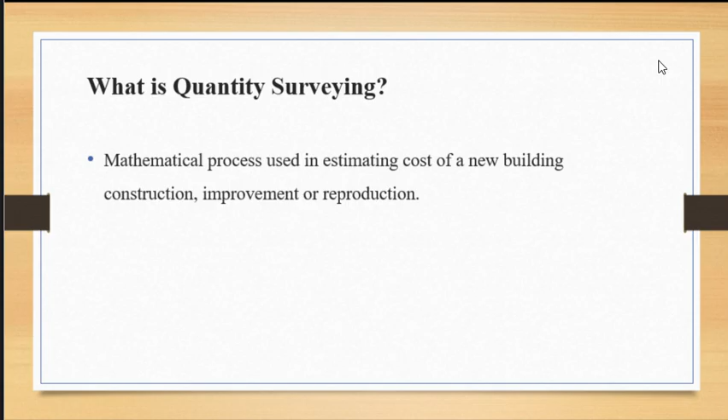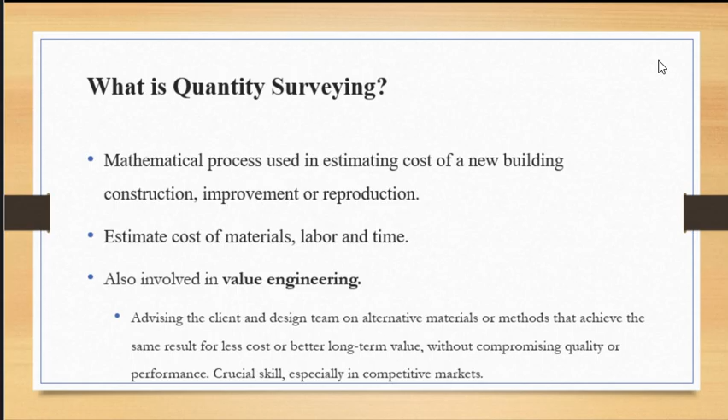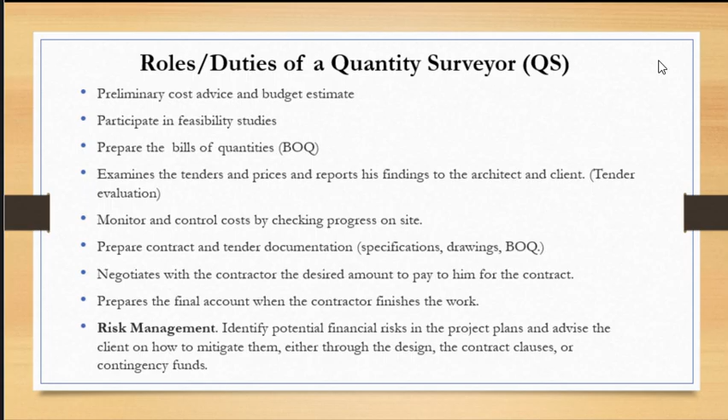Okay, in the last lecture we went through what is quantity surveying, what are we required to do in quantity surveying. We went through some modern concepts as well, for example, value engineering, and what are the duties of a quantity surveyor, and again something which is expected more in modern projects from the quantity surveyor is risk management, that you have to be an advisor to your client. Okay, if the project cost comes out to be 10,000 BD, but you know that can be 8,000 BD, you advise your client. Okay, so you have to keep these things in mind.

Okay, what skills and knowledge you should have to perform your job as a quantity surveyor. So most important things are you should have the knowledge of the prices. You should know the standards for measurement, how to measure something. Okay, because for each item the measurement can be different. You don't measure the concrete in the same way as you measure the wall paint or the plaster. Okay, so you must know how to measure them, what are the standards, what are the prices, what are the materials.

Okay, all these things are required, and the standards which we normally follow all across the world are called NRM, new rules of measurement. I don't know why they are still new, but this is what they call them. Okay, as given by Royal Institution of Chartered Surveyors something.

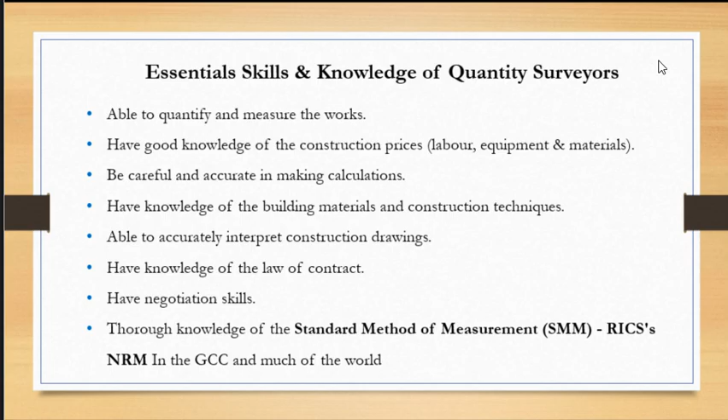And yeah, we didn't go through them, so we stopped till what is quantity surveying, what is the duty of a quantity surveyor, and what he should know to perform the duty which is required from him.

Now we will move towards a very important item, which is the construction contract documents. Okay, as a quantity surveyor you have to read them, you have to understand them, you have to prepare them as well. Okay, so you are involved in all aspects of these documents.

Now the most important thing about these documents, they are legal agreements. Okay, they are legal agreements.

So for example, I give to you something, okay, and I mentioned in that thing that the wall height is going to be 10 feet. Okay, and then in the end I come to the site one day and I tell you, no, I wanted it 11 feet. Okay, so you, before doing the job, this is your responsibility that you will ask me for to make it legal. Okay, you will not just trust me, okay, he is saying 11 feet, make it 11 feet. Okay, because the thing which you signed earlier was a legal agreement. Okay, so when you change your agreement, you have to change it legally, formally.

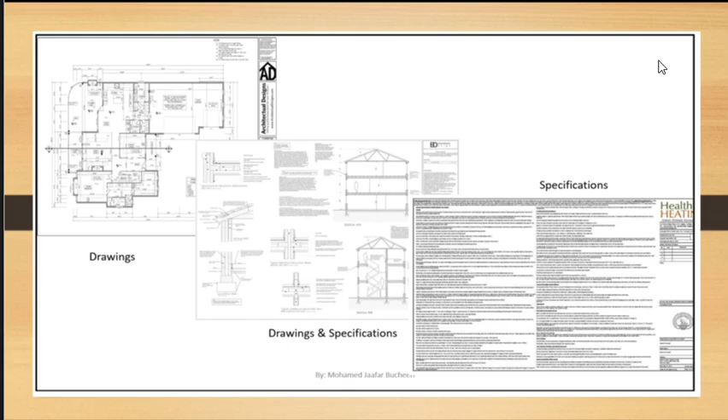Okay, what are the things about these items which should be measured on the site? I will give you an example later on.

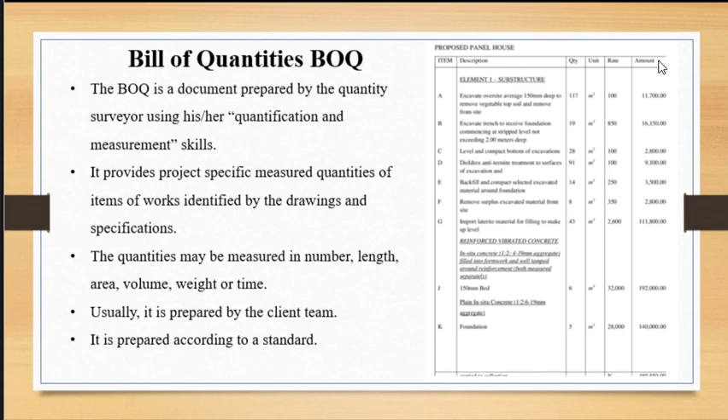Now it is only 4-story, so my foundations are smaller, so I need less concrete here. So instead of 5 cubic meters, I will only do 4 cubic meters. So how much amount will be less from this rate? So any variation, the cost of any variation in the project will also be calculated using the earlier rates of BOQ.

It will also provide you a basis for settling the final account. Final account means the project is finished. But this is what the contractor is saying, the project is finished. You have to go and check, right? So check against what? Against the bill of quantities you gave him earlier. I told you this much concrete, this much steel, this much excavation, and so on. So you must have done all the work according to the quantities which you specified earlier. Only after checking the final quantities will you settle the final account.

Okay, so the final payment is not done. In some cases, the final payment is not done even months after the project. It's like a warranty - you know, when you buy a phone or car or something, there's a warranty period, right? So sometimes in big projects, there's a warranty period as well.

Anyways, the cost analysis which is done in this BOQ can be used in future projects as well. So in most construction companies, when you go there - and I told you this would most probably be your first job - quantity surveying and so on. In most companies, you will see the senior person do the quantity and cost estimation in minutes, which is taking you hours. Why? Because they already have the templates from previous projects.

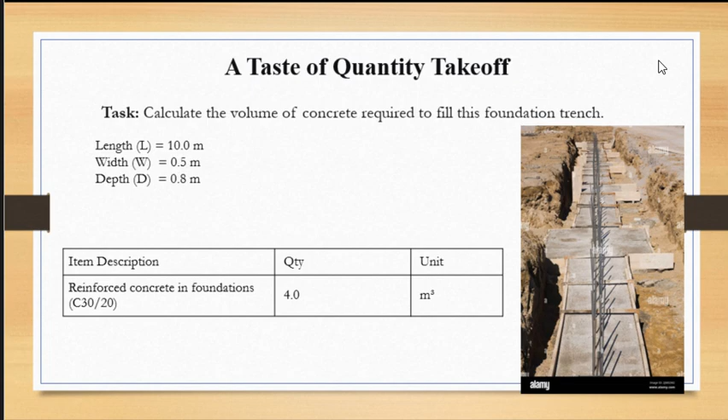Then we have the tender package. We have already talked about it. This is part of construction documents. The tender package is part of construction documents.

So you announce a project, I have a big project. The contractor will come to you and say, I want to give you my quotation, give me the tender document. So you give him the tender document on the basis of which he will do the quotation. Clear?

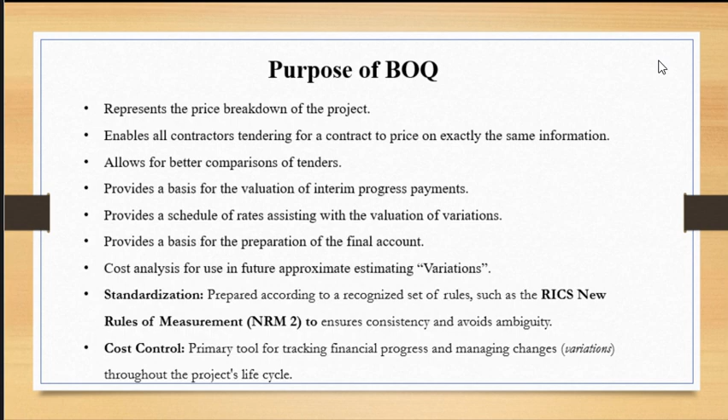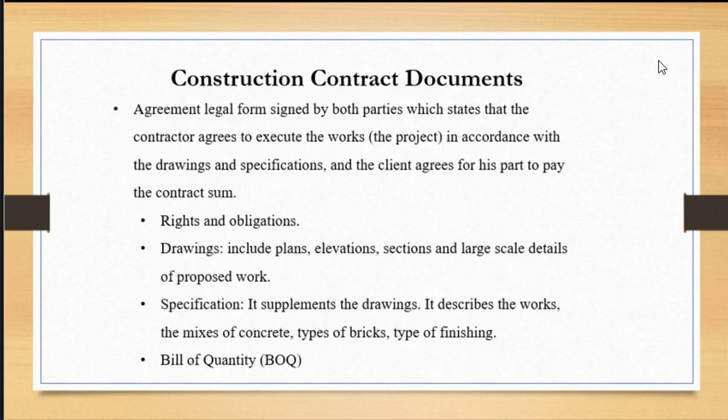This one is when you agree, when he will get the contract. You are my contractor, I am your client. This is the final one.

This one, before or after? Before, right? Before he got the contract. So when he is coming to me saying I need to do your work, I want to take your project, I want to give you my quotation, you will give him the tender package, the tender documents.

What do they include? The agreement, so he must know the terms and conditions. He will not sign it, and there can be some changes. The contractor may say, no, I will not do this, you can change this clause, or maybe you write I will give you 5% advance, but after he gets the contract, the actual final contract may have 10% advance. So these things can change, but the initial conditions are written.

I've already talked about drawing, specifications, and BOQ, and it is used to get the prices from the contractor. The main part, because he's talking about prices, the price will come from BOQ. The main item from which he will calculate the price is the bill of quantities.

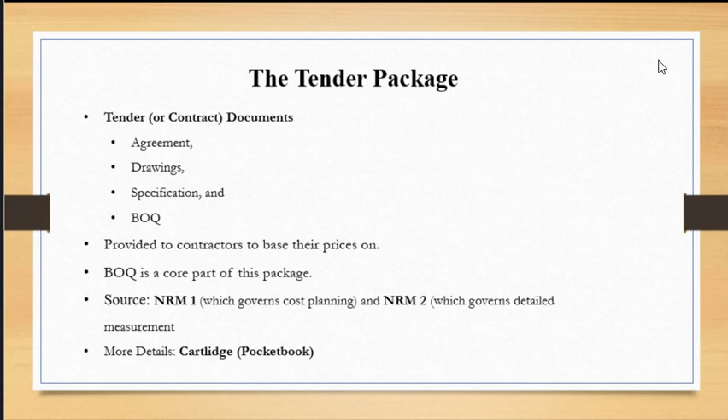And this is taken from the new rules of measurement, 1 and 2. If you want to see more details about it, there's this book on the blackboard.

There are some items which are measured in single dimensions, for example length or depth. So you only tell him, I need this much length of this item, or I need this much depth of this item. We talked about wires, right? For wires, we tell, I need this much length of the wire.

So can he give you any wire of this length? No, you will still give him the other specifications as well. One of the specifications is the cross-sectional area. When we measure something in terms of length, it means the area is what? If I am just giving the length, what am I doing with the cross-sectional area? I am ignoring it. Why?

Is it because it is too small? No. Not necessary. Why would I ignore something? Why would I just tell you, give me this much, 10 meters of wire? It's so constant - what happens? The area is constant. So when you give quantity of one dimension, that means the other dimensions are constant. So I don't need to measure it again and again. My point is it doesn't mean other dimensions are too small or I can ignore them.

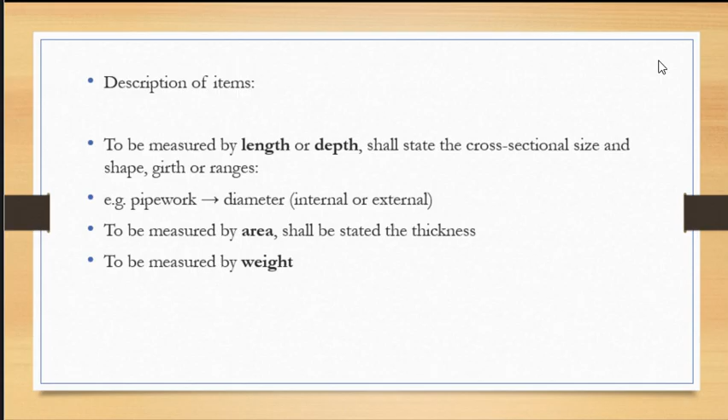So there can be some items in which you may give the thickness as well with the dia. Once you have found the length and the area, you can convert into weight as well, and this is again something which is very common with steel, with wires. Pipes, not so much, but okay - so you give the initial measurement as this much area and this much length, and then later on it can be converted to weight as well.

Okay, then there is soil as well. So soil, you are excavating or something, maybe you are filling up the soil. You already excavated, did the concreting and foundation and everything, now you have to fill up the remaining area. So you may need soil for that as well.

The usual standard is all types of soils can be used for backfilling. There are very special cases where you throw the soil you excavated from the ground - the soil is not good, the water table is too high, the soil is very soft, something like this. Normally we want to use the natural soil for backfilling because it's good for the ecosystem, and it's very cheap as well. So normally backfilling is done with the same soil.

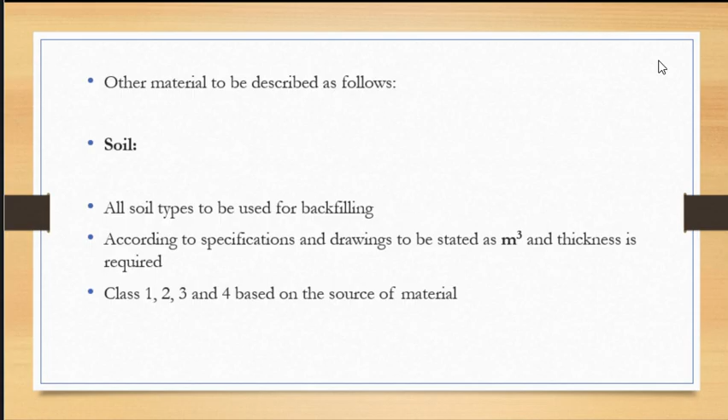And soil is measured in terms of cubic meters. Now, I have already uploaded the books, and one of the books is the new rules of measurement, NRM2. If you go to that standard, you will see these classes - class 1, 2, 3, and 4, they belong to the soil. So whatever classes you are seeing, you can go back there and check the standards in these classes in the NRM.

Okay, concrete is again measured in volume. And concrete is made up of aggregates, water, cement, and sand. We may use some chemicals in concrete as well - these chemicals are normally used to provide more strength, maybe, or we have very hot climate, so water evaporates very quickly, so then you start to see the cracks.

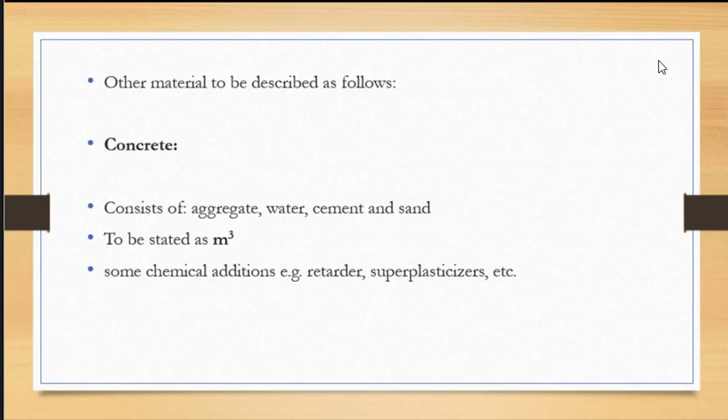I forgot, there's a special name for these cracks. You mean admixture? Yeah, we put admixtures to make the concrete improve its qualities. So if you are using those admixtures, then you have to give the quantity of the admixtures as well.

But normally, if it is normal concrete, the first four items - this much cubic meters of concrete, that's it. You don't have to give the quantity of water, sand, aggregate and cement separately. No, you don't have to do that. Concrete cubic meter, this much. If you are using some admixture, then you have to give the quantity of that thing separately.

And when you are mentioning the concrete, as I showed you earlier, you have to provide the quality as well. What type of concrete? All concretes do not give the same strength.

So, for example, we use this type to show the quality of concrete. This means normal concrete, normal cement - we call it OPC, Portland cement. This is strength of concrete, normally in megapascals, or kilonewton something. This is the maximum size of aggregate you will use in the concrete. So cement type, strength, and maximum size of aggregate.

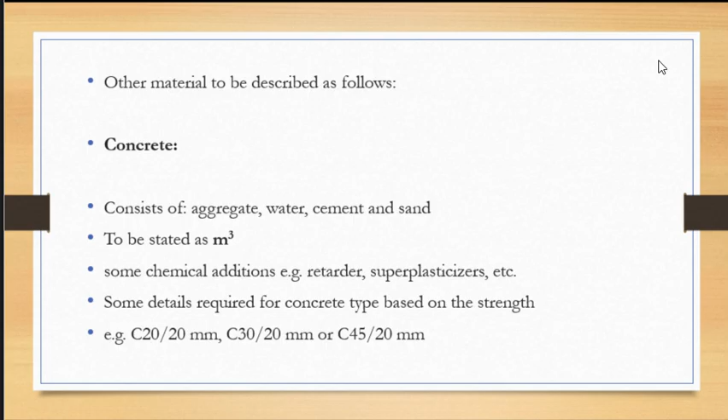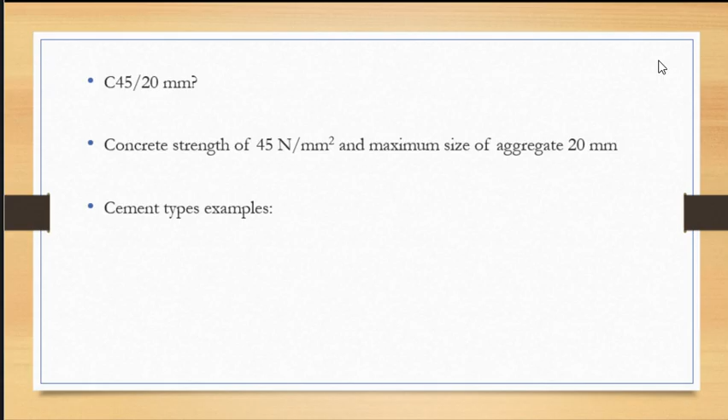So these are the types of cement we can have. We have ordinary Portland cement, we have rapid hardening Portland cement, and we have sulfate resistance Portland cement. This is the most common one, but we can use this one in hot climate as well, because the water will evaporate very quickly, so you want the reaction to be done fast, you can use this one. This one is used underground because the soil may have some sulfate, and sulfate can do the reaction with water and cement, so it will destroy your concrete.

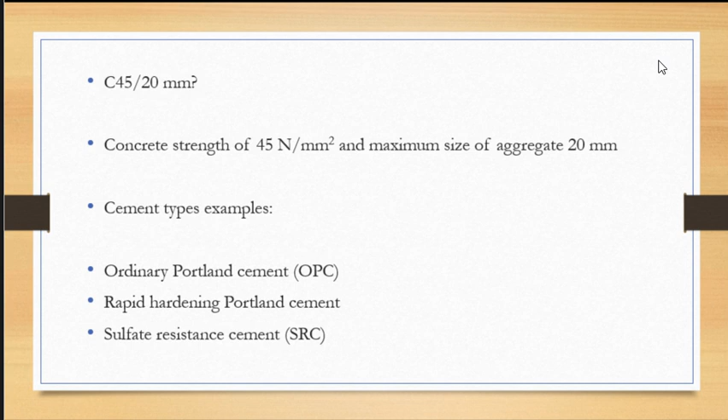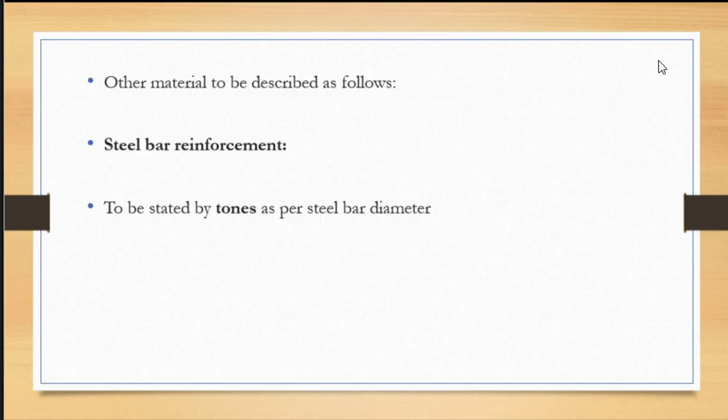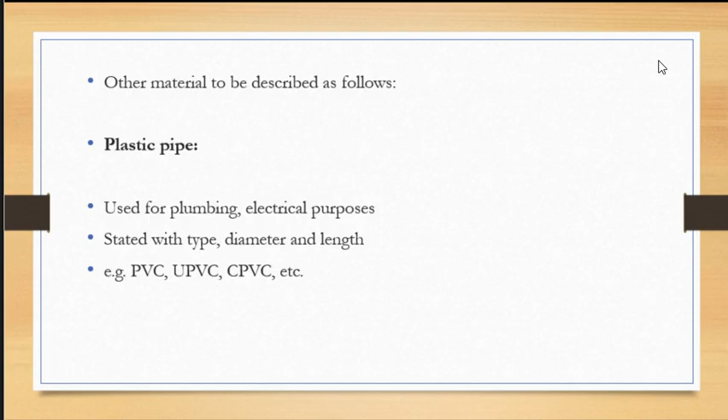Okay, plastic pipes which you use for plumbing or for electrical works, you have to give the type of pipe. So what types of pipes do you have? Plastic, concrete, aluminum, fiber, cement pipes as well, yes, they are there. So you have to give the types, the diameter of the pipe, and the length of the pipe, and as I already told you, if the pipe is very big, then you have to give the thickness as well. Especially for concrete or cement pipes, you need to give the thickness.

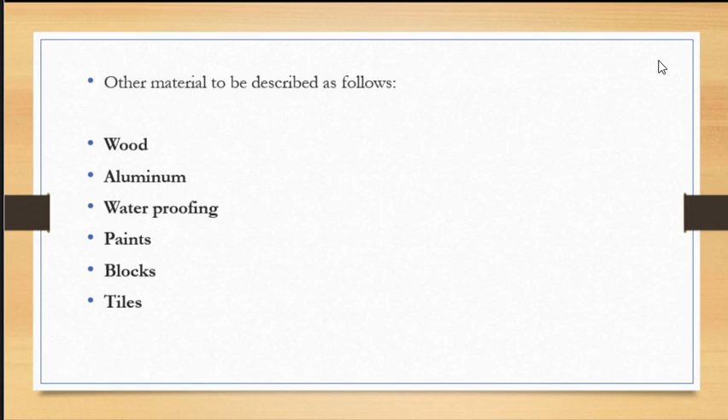Other items which you may have to use on the project: wood, aluminium, waterproofing, paints, blocks and tiles, and yeah, lights as well.